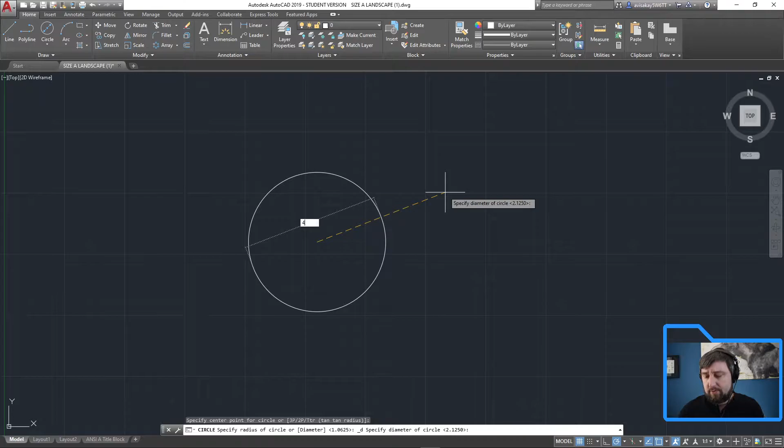All right, so let's start here with the circle in the back, the full circle, the diameter of 4.5. So there is where everything's going to fit inside. Let's go center lines because I'm going to do the drill holes that are on their own center line circle. That's these drill holes right here. What do we know about them? We know that they're at a 3.5-inch circle, and they are a 1/2 inch diameter.

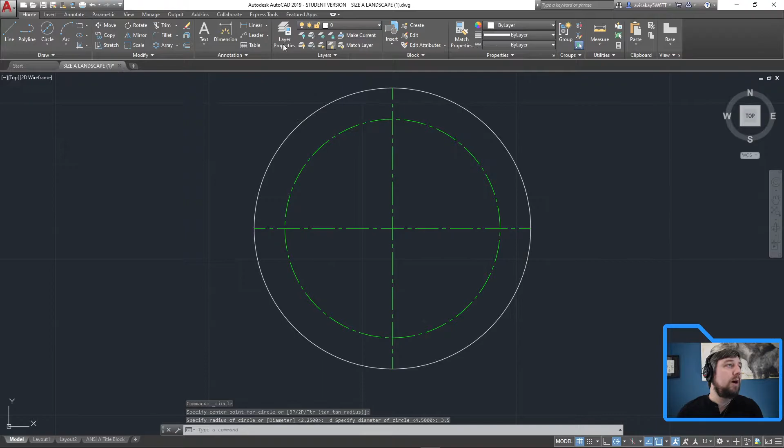So from here, I have to click twice when I click out. This is 3.5, so all the circles are going to be right there. These are drill holes, they're object line holes. This is 0.5, and you can just copy and paste all those around, or you can do what we did for the snowflake and polar array it, change the items to just 4, enter. It doesn't update until you click out. So those are 4 drill holes all the way around at a 1/2 inch diameter at those quadrant points, and this one was 3.5. Now we can do the inner circles of this, moving as quickly as possible.

Just pause if you are not with me. So 2 9/16, 1 5/8, and 1 3/16 in the back, and then there's, where's that guy? Oh, that's 2 1/8. So let's draw those. So the first one I see there, object line here is 1 5/8, 1.625, enter. Next one, 2 9/16.

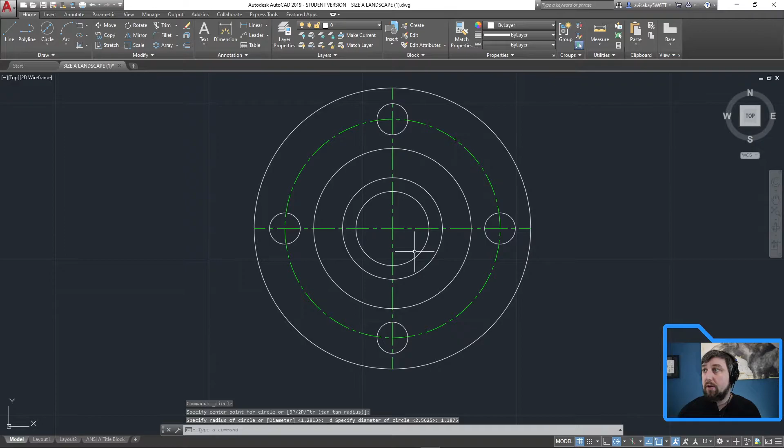I may or may not be putting this into a calculator. 2.5625, knew that right off the top of my head. And 1 3/16. Three divided by 16. 1.1875. And then the only one left now is a hidden line circle.

This one's hidden because it's stepped in behind here, right? See, this line here is for another circle, but it's behind this face. So it's going to be hidden. That's the 2 1/8. So 2 1/8 on the hidden line layer. Hidden line circle here, 2.125. See how it's behind that point? So there's a step down. So this is the whole reason why we're going to be drawing a section view, is to show that step down. Only other thing that's new here on the front view is that this line actually becomes a cut line.

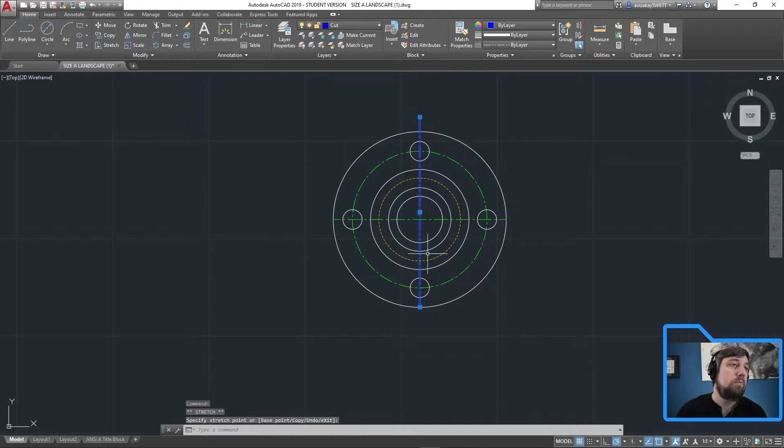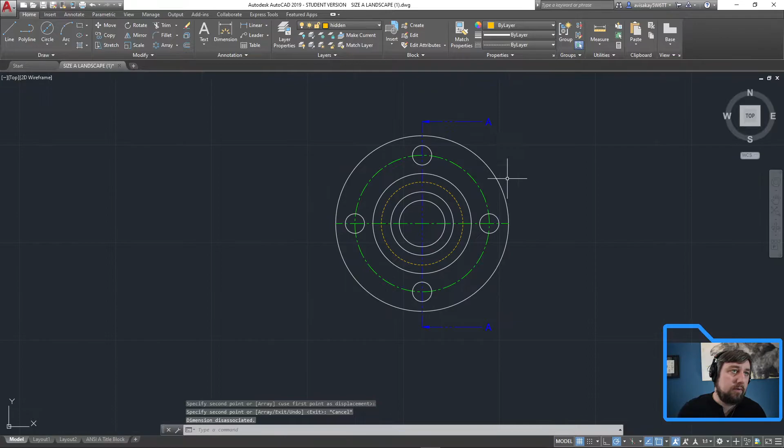If you're on WebCAD, just make the line blue. I'll be fine with it. Draw this line out, and then you should technically put arrows on it pointing, and then Shift A. Whoop, no, enter. Why is that hidden? I did that in the wrong layer. That should be cut. Beautiful. And then let's copy it, put it on the bottom. Where's the copy button? There. That length. Yes, there's rules to all this. We're glossing over it. It's 2020.

All right, so now let's draw our actual section view on the side. Our section view on the side is a cut through the whole object. It's going to basically look like this top half here, but we're going to mirror it about, and we'll have the hatch and everything. So back in our actual drawing here, let's just draw a center line. Let's continue this line out, like so. And now let's draw an object line arbitrarily back here.

Mouse over on the side here so you get your extension line so you know your height. There you go. So we know that height's correct. It's just like before, we're transferring the lines. This is why everything's lined up, so we can transfer things. And now we can start drawing the steps on the side. So if you look here, we have 5/8 right here. Perfect. So going from here, I'm going to go this way. I'm going to go 5 divided by 8, enter, 5/8.

And step down. How far down do we go? I don't know, right? So how do you know? If you look over here, you see that it's stepping down to this circle, and that's our front face circle, right? So I'm actually going to transfer a line over from here, go all the way back. I'm just going to stop here because I'm going to trim it.

And this line here is going to go down here, perpendicular. There you go. You trim it or just click and drag the line over. So there's that first step. And then how far over does it go? Well, they're of course being sneaky and not giving you this dimension in here. They give you that one, that one, that one, make you figure out that one. I don't feel like doing math either. So let's just do the full thing, right?

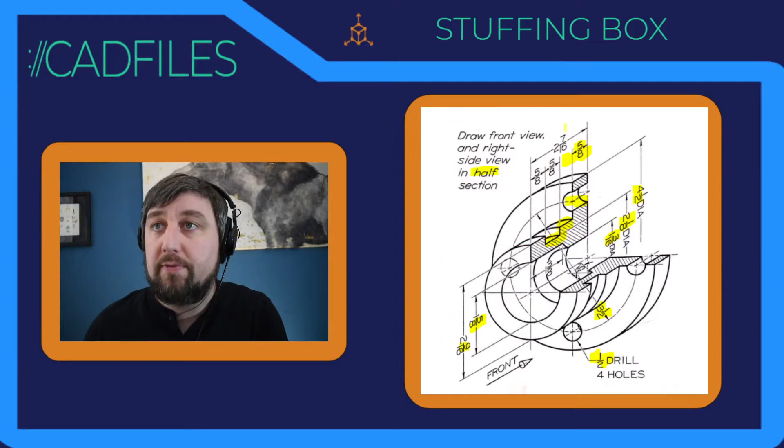The full thing is 2 7/16. So I can actually do that line from here. What does it say? 7/16. Of course, it is a fraction. I don't know off the top of my head. 7 divided by 16, it's like 4 or something. Yep. So 2 7/16, so 2.4375. Enter. The whole object goes there. So I'm just going to draw that up. Like so. Just so I can trim things later. Leave everything there. We're going to have plenty of trimming to do in a second.

But now we can work backwards from the front instead. So from the front, we know 5/8 is the same height of the line we just drew. So I actually can go from here, this corner, move my mouse over here so I know it's straight, and just do 0.625 or 5 divided by 8, enter, down. How far down do I go? It's to our hidden line. So let's draw this line now. Let's drag this one back, enter, line again.

Now I'm going to go to that endpoint, right? That square should be endpoint, and it goes here. How far over does it go? This also on the drawing sheet, it says 5 divided by 8. Enter, goes there, and then step up to there. So now we have all these steps. So why don't we just trim this now? So it's cleaner. You can see what's happening, right? We start to have this shape of that step, which is what's going on the side view, right? We have that step now. So what's that length there? Doesn't matter. We figured it out all on our own.

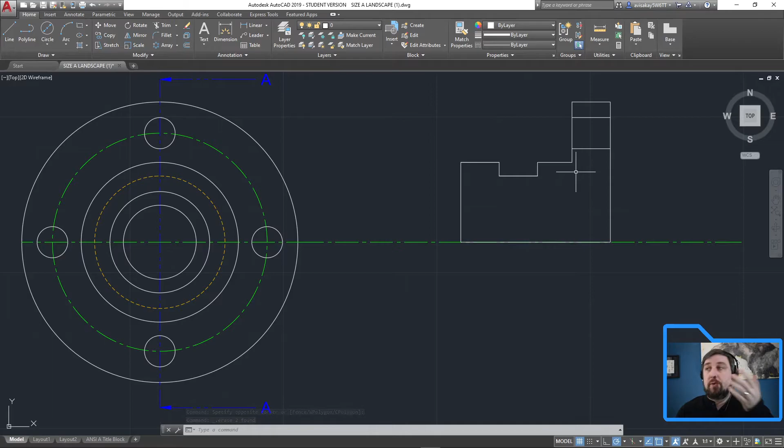Last thing that should be transferred over on this side before we do the more difficult part, the inside steps, is our drill hole up top here. These are not going to be a hidden line this time. They're not going to be a hidden line because we sliced through the object. We're making a section view. And you actually are going to see these lines here. You're going to see them because we're going to hatch. We actually slice through the object. They're physical lines that you're going to see when you're at that point. All right, last thing to do is the step on the inside and then mirror it and hatch it.

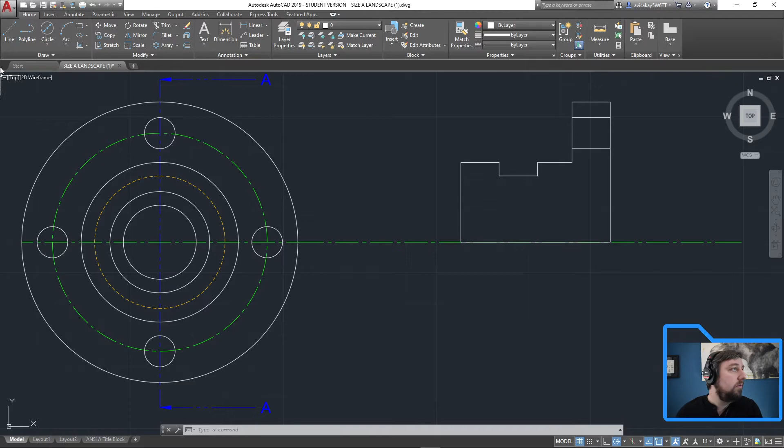All right, so we got to go back to this point. How far back it goes? It goes 1 3/8, right? So that is this line circled from here back so that we can get to this line here. So line, it's going to be here to here. And now I'm going to keep this line straight, and it says 1 3/8, right? 3/8. I know this one. 375. Yeah. 1.375. Enter. Now from this point, it's going to go down at 45 degrees.

So I'm just going to make this line. I already have my polar setting at 45. Perfect. I'm just going to click. Doesn't matter this length because it's actually going to intersect with this. So line from here, line. I'm just going to draw this line straight back, cross through everything, escape, and now I can just trim away. So this goes away, that goes away. And then this actually is an opening in the front. So now I can delete, and then that line there, delete.

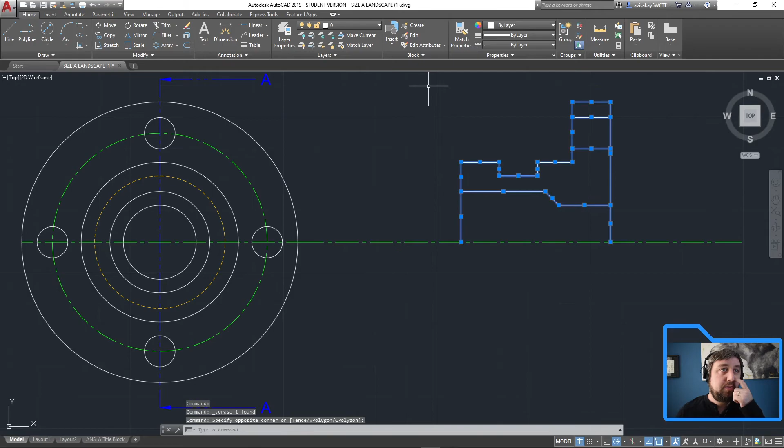Whoops, should I trim this still? Is this gonna let me trim this? Yeah. Like that. Except I shouldn't have trimmed that one. Whoopsies. And I shouldn't have trimmed that one. Swear I know what I'm doing. Like that. Take this whole thing, mirror it. This is making it a full section view instead of a half section. There you go. There's our 45 degree on the inside.

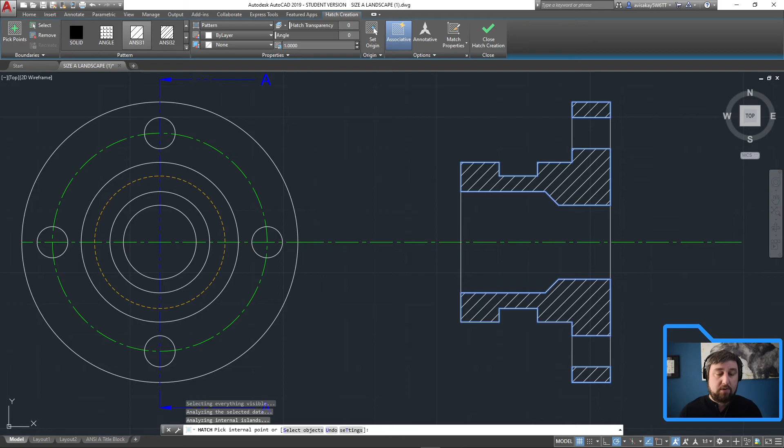And then the last thing you need to do is hatch. That's not how you spell hatch. Internal points, that one, webcam. If it crashes, don't hatch it. It's fine. And that is complete. No, the last thing is just these lines down here. So see how this line's inside here and this line's inside here from the 45s. So you just need to connect these points, and then we're done.

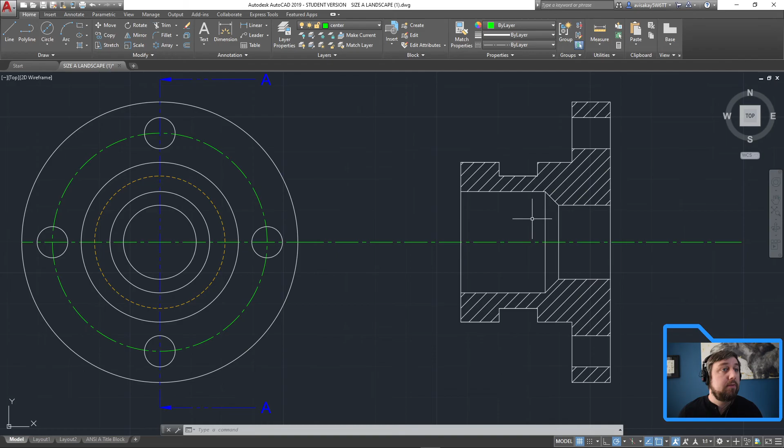Now we're done, right? Oh, I lied again. Jeez. What are these? These are circles, right? What do they need? Every circle needs a center line. Midpoint, perpendicular, midpoint, perpendicular. There you go. And then I lied one more time. I lied. This should be labeled here. Caps lock on, everything type, section A-A, showing you these A's here.

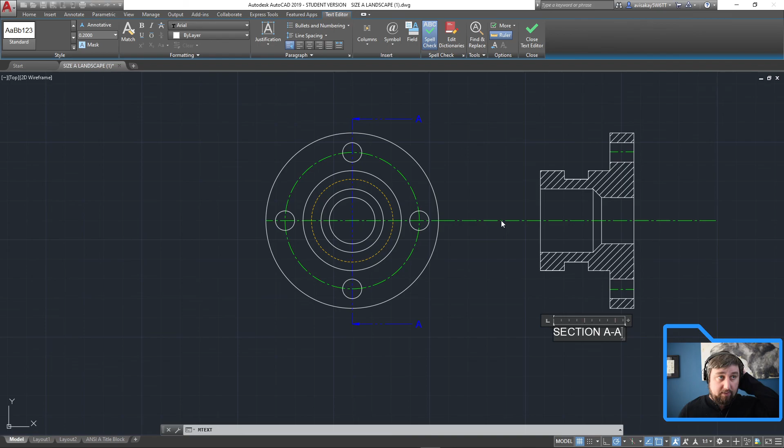Now we're done. Section view. Beautiful. A little over 10 minutes. Flew right through it. Easy peasy, right? We've cut through the whole object. We hatched it 45 degrees.